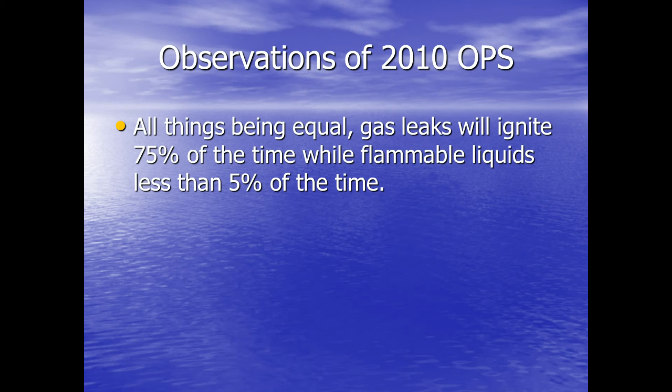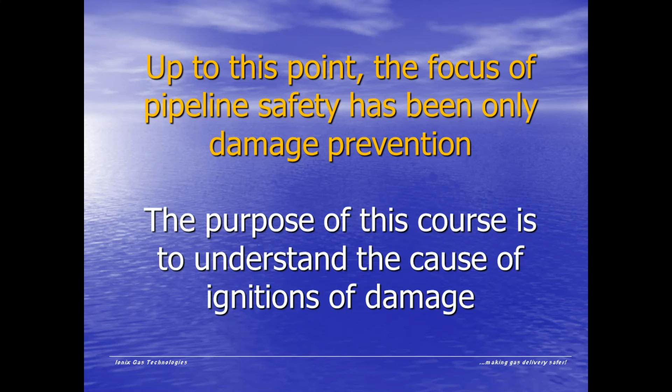So the observation of this is, all things being equal, if a natural gas pipeline leaks, 75% of the time it's going to ignite. Whereas if a liquid flammable pipeline leaks, less than 5% of the time it's going to ignite. So the real question is, at this point, the focus of pipelines and safety has generally always been about damage prevention. The purpose of this course is to understand the cause of the ignition of the damage.

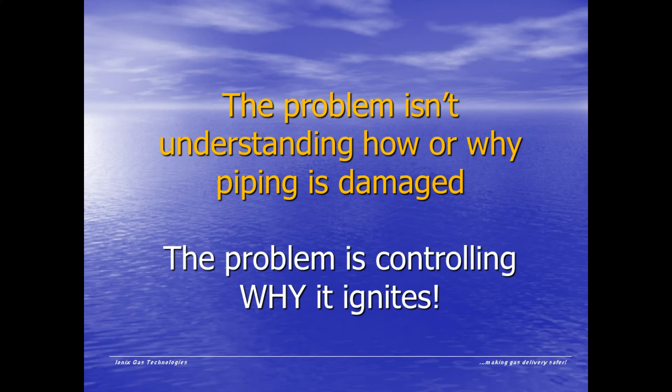The problem isn't so much understanding how or why piping is damaged. The problem is controlling why it ignites. The purpose of this course is to fill that gap, to start to explain the reasons why pipelines, when they're damaged, ignite. I hope this video will be helpful to you.

The first thing we're going to do is to talk about some presumptions as we begin the course. We have 2 goals in this course. First is a broader goal, that we want you to learn to identify known static ignition risks in your systems. By understanding some of the basic principles of static electricity in polyethylene pipe, you will be able to educate your field people to recognize a potential static ignition risk before it occurs.

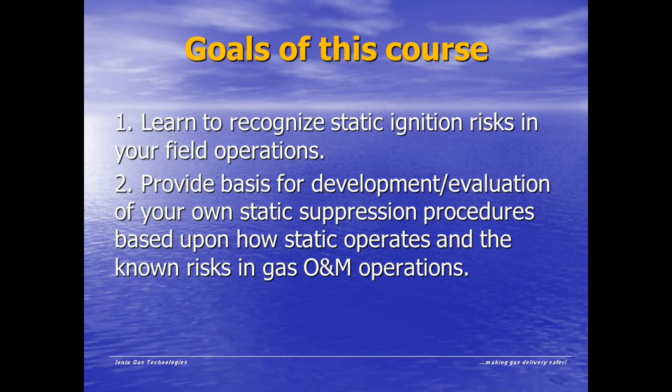The second thing we want to do is to teach you enough about static electricity so that you can go and evaluate your own static suppression procedures to make sure that they're adequate and they're effective. When we go out and talk to people, we find some gas companies have no procedures whatsoever and some have very detailed procedures.

Whatever the case may be, we hope at the end of this class you will be able to look at your operation and make sure, 1, that you have sufficient static suppression procedures for those known hazardous ignition risks, and 2, that those procedures are effective in eliminating the static in that procedure.

There are two presumptions we make here as we go through this, and I want to deal with them very quickly, and then we'll go on to understanding static electricity. The first is that static electricity is a known and researched phenomenon in the gas industry. I have some people that think you can't understand static electricity. It just shows up when it shows up. It's a black art. Nobody can understand it. That's an urban legend. As we go forward in this, I'm going to give you your industry's research about static electricity and polyethylene pipe as the basis to understand static suppression procedures.

The second thing is, we want you to understand too that your research organization has said that static electricity is a problem for all gas distributors. I have some distributors who deny they have a static issue. I have some that seem to be in fear of static. Once again, a middle ground is probably most appropriate. Here's what your research organization said about static electricity and gas operations systems: As the use of polyethylene pipe for gas distribution lines increases, the safety issues relating to electrostatic discharge of PE pipe during repair operations continue to be a major concern to the gas industry.

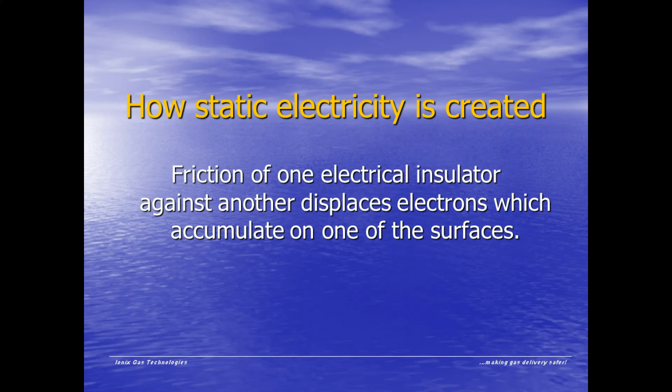Well, then the next question is, what causes static electricity? Static electricity is caused by the friction of one electrical insulator against another, and it displaces electrons and they accumulate on the surface. So in the case of natural gas in polyethylene pipelines, you have plastic, which is an electrical insulator. You have methane gas, which is an electrical insulator, inside it. And as the methane moves through the pipe, friction is caused in that pipe by the gas moving through it. These electrons get knocked off the methane molecules and they start to accumulate in certain places on the inside of that pipe. So it's friction that causes the displacement and the creation of static electricity.

And in the instance of natural gas in polyethylene pipe, it's the flow of natural gas, methane, inside the polyethylene pipe that creates the static and builds up the static charge. Well, so what? I mean, there's static everywhere. So what? Well, here's the problem. Mother Nature doesn't like electrical imbalances. The physical world is intended to be at electrical neutrality.

In the summertime, when the hot air rises and then it cools off and drops down again, the friction of the air going up and down causes static electricity, and sooner or later, those electrical charges will want to go to electrical neutrality, and in the summertime you have lightning as that static charge in the cloud arcs to the ground to neutralize each other.

Well, the same thing's going to happen inside your polyethylene pipe. If static electricity builds up, Mother Nature does not like electrical charges. It wants electrical neutrality, and it will remedy the situation. It will arc to ground sooner or later to relieve itself of the electrical charge unless you do something to prevent it. And that arcing, in the case of natural gas pipelines, will either lead to an ignition or to a pinhole leak in your pipe.

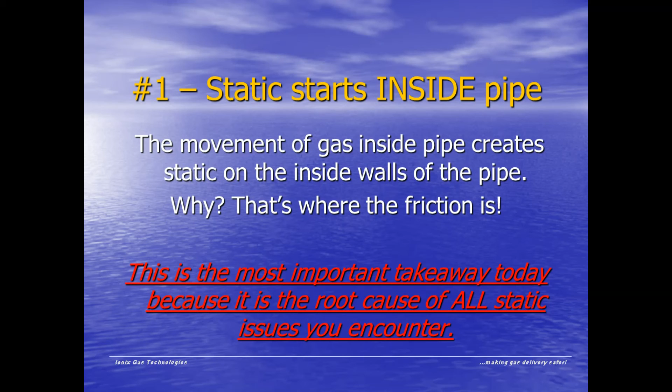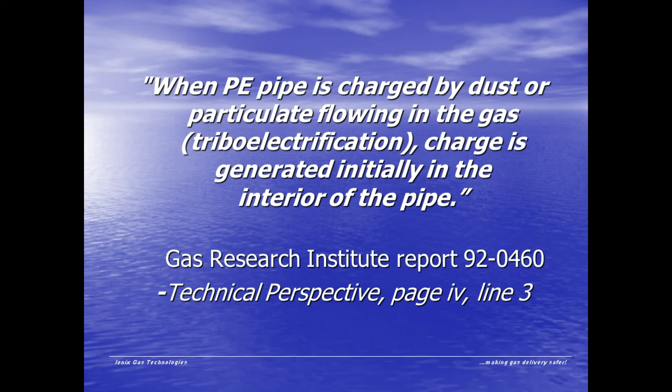If you don't remember anything else from this course, remember this first and most important principle of static electricity in polyethylene pipe. All static issues that you have ultimately are root caused inside your polyethylene pipe with the passage of gas inside the pipe. This is not my opinion. This is what your industry research company has said: when PE pipe is charged by dust or particulate flowing in the gas, triboelectrification, charge is generated initially in the interior of the pipe. All static starts inside the pipe.

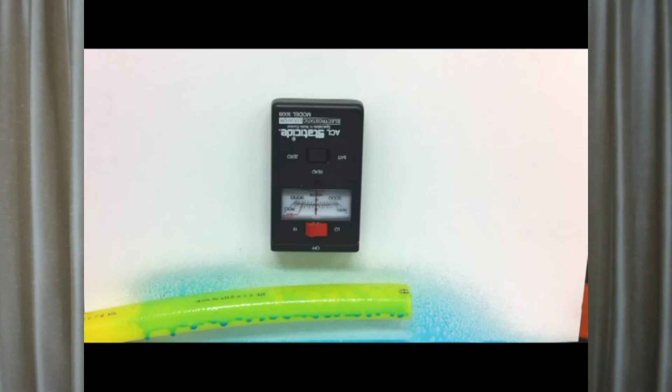As you see here, we have the electrostatic meter mounted on top pointing down and a piece of polyethylene pipe. And as I rub the pipe, you'll notice that the static meter starts to indicate the presence of static electricity and it deflects the meter. I then spray the pipe with our aerosol static suppressor, and you notice the static is then gone, indicating that we have dissipated the static on the pipe. The point of the illustration is to show you how easily static is generated on polyethylene pipe, and that really you need a meter to determine its presence.

Now, I have operators that ask me, well, should every guy have a static meter? And the answer is no. Every standards department ought to have one electrostatic voltmeter on hand for measuring purposes. However, you want to presume, and your industry research says, that you need to presume that there's static in your system. If you have your procedure contingent upon your field people making a measurement with an electrostatic voltmeter, that's a very problematic thing to do.

If they don't know how to do it, reading static's a very difficult thing to do in the field. You really need a lab environment to control your surroundings in order to get an accurate reading. And you wouldn't want a guy who misreads it and thinks there's no static, and you wind up having an incident on your hands. So you should always presume that static is there. However, a static meter is good for any operations department just to keep on hand in case they do need to measure some static.

The second principle of static and plastic pipe is this. Once static is generated or created, it just doesn't go away. It will not conduct away because it's sitting on a non-conducting material. That's why it's called static electricity. It's on a material, it just sits there. So static electricity, once it's generated in your system, is just not going to go away because you wish it away. It's going to stay there until it dissipates itself or you purposely get rid of it.

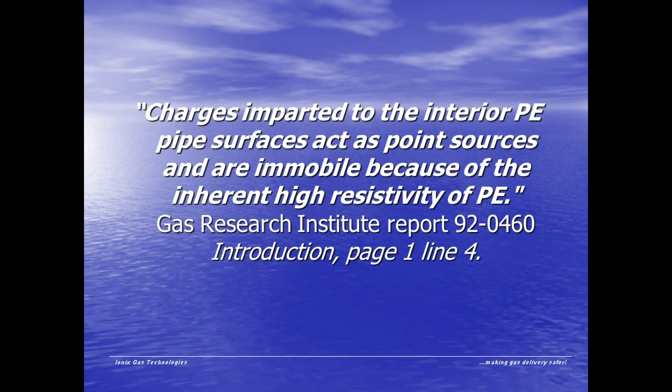Here's what your industry research company has said. Charges imparted to the interior PE pipe surfaces act as point sources and are immobile because of the inherent high resistivity of PE. In other words, what they're saying is polyethylene pipe, because it's a superior electrical insulator, when that charge gets built up in the interior of that pipe, it's just going to sit there and it won't go away until you do something about it.

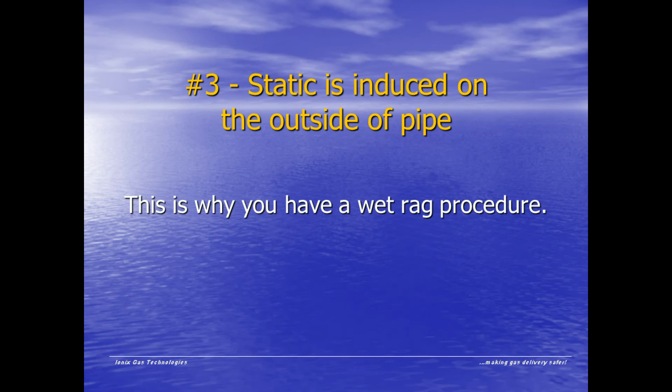The third thing is that static electricity is induced on the outside of the pipe. Now, that's why you do the external static dissipation. Remember, we said static always starts on the inside of the pipe. It stays there. And what your industry research says is that interior static induces or creates a charge on the outside surface of the pipe.

Now, I can explain in physics why that happens, but it's beyond the scope of what's necessary for you to understand. All you need to understand is that the static charge that you have on the outside of the pipe is caused by the static that's on the inside of the pipe, and that you need to dissipate the static on the outside of the pipe. Here's what your industry research organization has said. The electric field resulting from the interior charge induces exterior charge on the pipe.

Finally, the fourth principle to remember about static electricity and polyethylene pipe is that static will arc. Static electricity just won't go away. Static charges will arc and ignite a gaseous mixture if the interior static charge is exposed to ground.

Here's what your industry research company has said. The interior charge problem is still evident after gas flow has been cut off and a defective section of pipe is cut for repairs using a saw or circular cutter. When a metal object penetrates the inner wall of a charged pipe, a spark discharge is inevitable. It's not probable, it is inevitable.

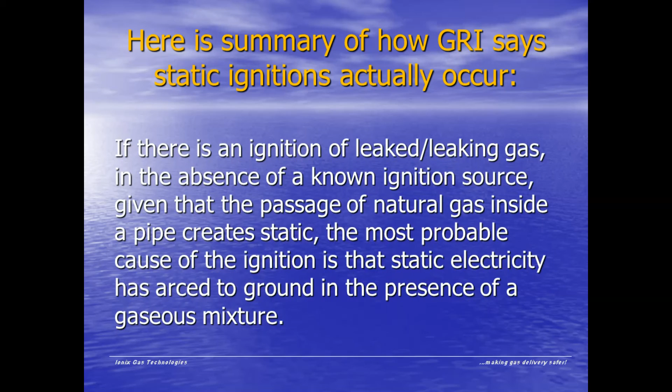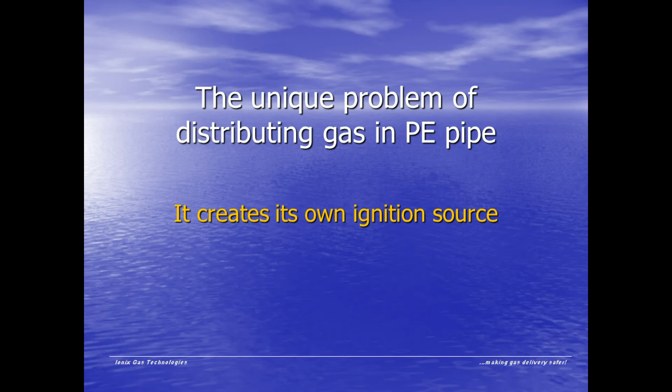The root cause is the static electricity that has been generated on the inside of the pipe. This means that you have a unique problem in distributing natural gas in polyethylene pipe. It creates its own ignition source.

This next video you're going to see was broadcast in 2001 in Oklahoma City by the Evening News. And I apologize in advance for its quality. It was broadcast over the air, and a friend of mine recorded it on his TV as it was broadcast. So the quality is quite grainy, and the audio is difficult to hear. But essentially, here's what happens.

A gas company is called out because of third-party damage, very typical, and they arrive on the scene to find gas blowing out of a third-party damaged line. They're there repairing it, putting a repair clamp on it, when all of a sudden, while they're working on the pipe, the gas ignites on camera. And you will see the guy scrambling to get out of the way as it ignites.

The question, again, just like before, is not how the pipe got damaged. The more important question is, why did it ignite? You had a trained crew there who would not use any sparking or flammable materials or procedures that would cause a spark. And yet, while they were working on it, the pipeline ignited. So as you watch this, ask yourself that question: what could have caused the ignition?

A natural gas explosion rocked an Oklahoma City neighborhood just before noon today. Workers were trying to repair a ruptured line at Northwest 131st and MacArthur when the gas ignited. Newsline 9's Heidi Browning joins us live from that neighborhood. Heidi? Well, Kelly, there's a bit of a mess out here in the neighborhood. You can see behind me what's left of a fence, charred remnants of the posts, and quite a lot of digging that's been done to make repairs to those lines. But people coming home this evening will find a much calmer scene than what many people saw this morning.

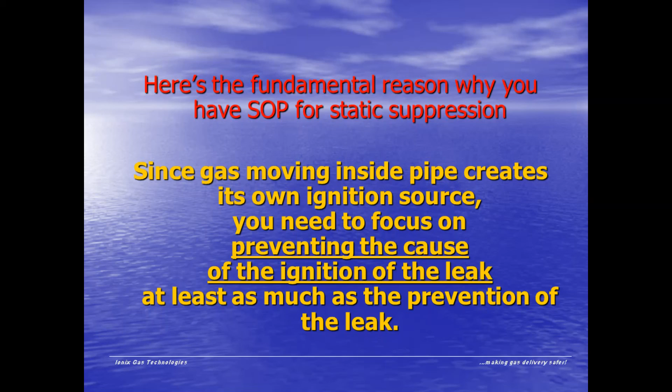So here's the fundamental reason why you have standard operating procedures for static suppression. Since gas moving inside pipe creates its own ignition source, you need to focus on preventing the cause of the ignition of the leak as much as the prevention of the leak itself. Now, up until this point in time, the only procedures that the natural gas industry had for dissipating static was very crude grounding using soapy rags. That was originally developed and recommended by the American Gas Association about 25, 30 years ago when plastic pipes started to come out and they were having static issues.

Since that time, there have been great improvements in anti-stat technology, and some of those advances are incorporated in our products which we bring to market to dissipate static. But most companies still use what's called a soapy rag or wet rag grounding method to dissipate static. And there's a couple problems with that.

The first thing you need to be aware of is that when you're using soapy rags or grounding to dissipate static, you are essentially putting your workers in close proximity to an ignition in order to get rid of the ignition. In other words, you're going to put soapy rags to dissipate a static ignition. They've got to touch the pipe that could arc to ground and cause an ignition in order to get rid of the static. The second thing is that when you use soapy rags, you really can't determine if they're effective. What I mean by that is this.

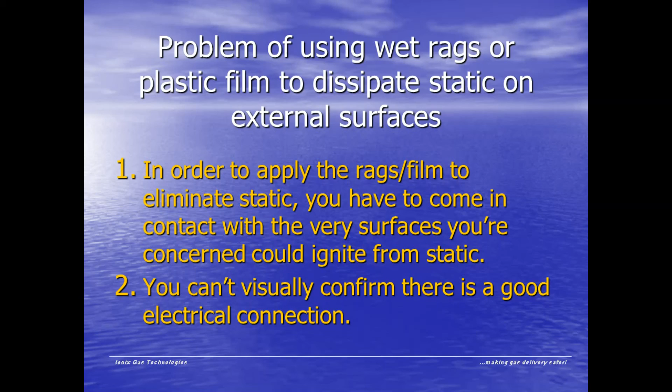Soapy rags and grounding create an electrical circuit. You wrap wet rags which conduct electricity, you put a conductor on it, and then you ground it. You're assuming that there's an electrical connection. In other words, the rag is wet enough, the electrical wire is not broken, and you got a good ground. You have no way of knowing that. You presume that's the case. But there is no visual way you can tell if you have a grounding circuit on those wet rags and ground rod.

And finally, wet rags will do nothing to eliminate static on the inside of the pipe. Think about it. You have polyethylene pipe and it's containing methane gas under pressure. What makes you think that if you put soapy wet rags on the outside of that pipe, that somehow or another that's going to dissipate the static on the inside of the pipe? Of course not. And your research organization has said that will not solve the problem of static inside the pipe.

And it's very, very important that you understand, that you're not led into a false sense of security that simply because you have put wet rags on the outside of the pipe, your static problem is finished or is dissipated. Here's what your research organization has said. Prior to this project, safety procedures involved wrapping the pipe with wet soapy burlap. This procedure is effective for neutralizing exterior charge accumulation, but does not affect the interior charge of the pipe.

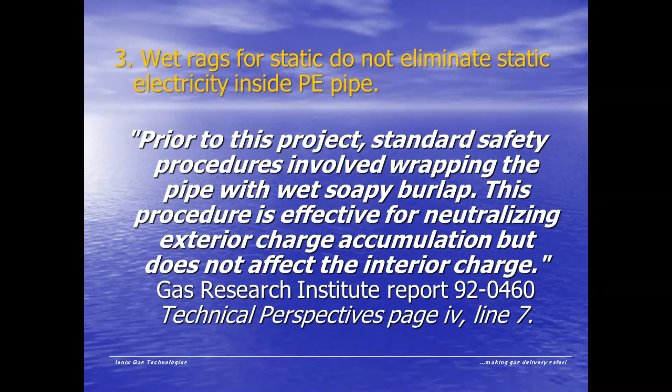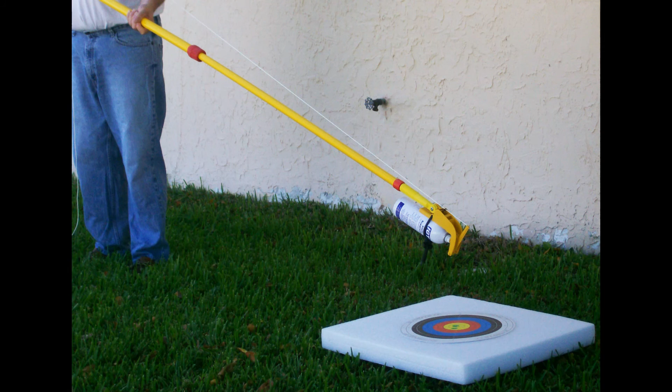Our aerosol static suppressor is a topical anti-stat, and you can apply that remotely so your people don't have to get near the static charge in order to dissipate the static charge, nor do they have to ground it for our product to work. So as we have these four basics now of static electricity and polyethylene pipe, we now can go on and take a look at the most hazardous operations that you will encounter as operators of natural gas in polyethylene pipe.

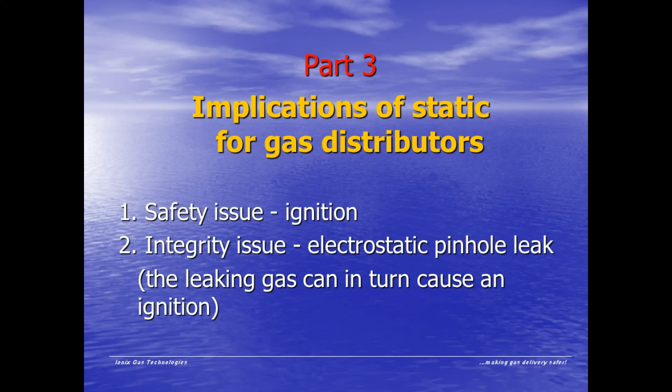Now that we understand the four basic principles of static electricity in polyethylene pipe, we can apply this to the particulars of distributing natural gas in a plastic material. Most people, when they think of static electricity in polyethylene pipe, only think of it as an ignition or safety issue. In reality, static electricity in polyethylene pipe causes two problems. The first one is an ignition risk, but the second is an integrity issue. Static electricity puts electrostatic holes in polyethylene pipe.

So as we go through this, the first thing we're going to talk about are the 5 most dangerous static ignition gas operations. And then after that, we're going to talk about the integrity problem, how static electricity puts holes in plastic pipe. So first, the ignition risk of static electricity in polyethylene pipe.

In order to have an ignition, there are 3 necessary components. You need to have a gaseous mixture of 5 to 15% methane to air. You have to have a sufficient static voltage. 3,000 volts is necessary to create 1,100 degrees heat during arcing that will ignite and begin the methane oxidation. And finally, you need proximity to electrical ground. In other words, that static charge has to arc to ground. So the instances that cause your significant ignition risk possibilities must have these 3 conditions present.

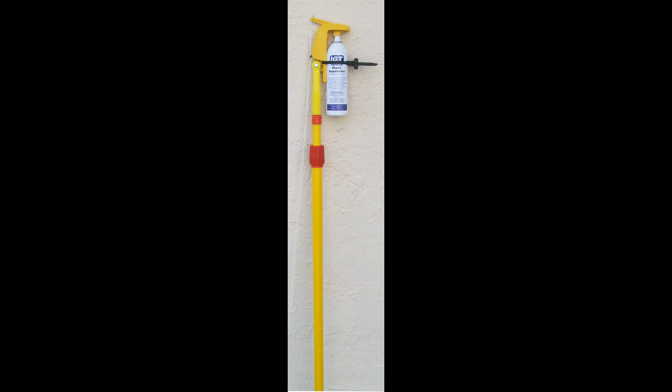In other words, we have an aerosol. Here's a picture of our aerosol reach tool. Our customers take this tool and they put our aerosol on it, and from outside the excavation, we tell them to spray into the break, into the cut, because remember, all the static starts on the inside of the pipe. So you don't want anybody to get near it. You want to spray that inside the cuts before somebody goes down in the excavation.

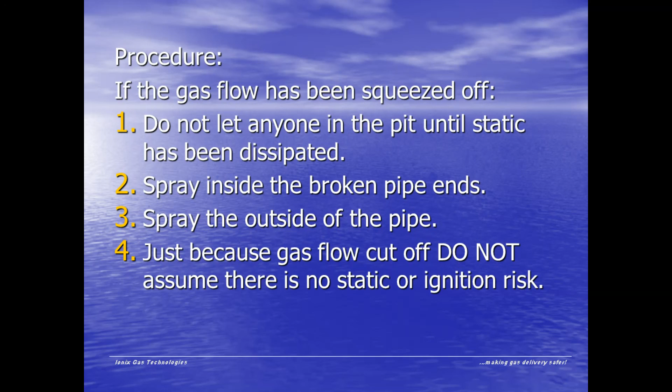And then after you spray the inside of the cut, you want to spray the outside edges around the broken ends on the outside of it. The most important thing to remember is do not assume that it's safe to enter an excavation simply because the gas flow has been cut off. Remember that static electricity, once it's created, just doesn't go away. And you put somebody down that excavation and they reach there to put some soapy burlap around it, they may act as a grounding rod and ignite the gas that's laying in the bottom of that trench.

Several months before this video, that very thing happened with very, very serious injuries to workers. So we tell our customers, after the gas flow is cut off, don't go inside the excavation until remotely you've dissipated the static inside the cut and then around the cut and around the edges.

Now, you may have a situation, and it happens, where you can't shut off the gas flow. Then what we tell our customers to do is, again, take that reach tool and spray our aerosol static suppressor as close to the cut as you possibly can, because again, the static is building up on that outside edge. Now the gas flow is going to want to push away any liquid or spray that's put around there, but at least you're getting some anti-stat in there that dissipates any static on contact.

Our product's a topical anti-stat. It doesn't need to be grounded. It's not soapy water in a can. What it does is that on a chemical basis, it literally eats up static. And so when you have a situation where you have blowing gas and you have to put somebody in the excavation, you want to keep spraying and bathing that area where that gas is escaping with our aerosol static suppressor as long as you can until you've brought everything under control.

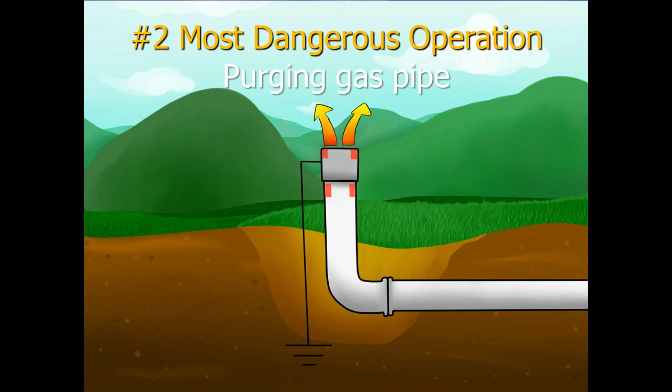The second most dangerous operation is purging. When you think about it, purging is just like third-party damage. You've got a line that's blowing gas.

Now in this illustration, you'll see that there's a grounded metal purge pipe on the end of this pipe. And everybody assumes simply because you've got a grounded pipe and it's a metal pipe, it's going to be safe and there's no static. Not true. You can have metal pipe build up static charges when coatings are on the pipe, when debris builds up. Any place on that pipe that gets oxidized or rusted, you can have a situation where it's a non-conductor and static charges can build up.

And again, just like soapy rags, you're assuming that there is an electrical contact to ground, but you can't prove that. You're assuming that. In the same way, you ground that metal pipe, you're assuming there's a circuit there. You have no way of actually knowing that's the case. So what we tell our customers to do when you're purging, even if you're using a metal grounding purge pipe, is that you take our aerosol with a reach tool and you remotely spray inside the pipe.

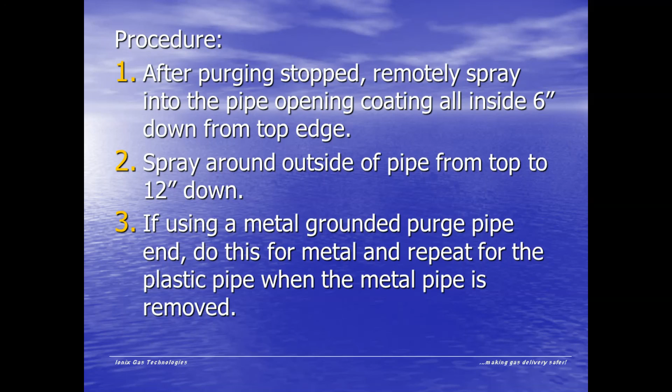Remember, the inside edges of the pipe that's blowing gas is where the static is. Remember, static always starts on the inside of the pipe. And so we tell them to first go around the pipe and spray inside the pipe remotely, then spray on the outside of the pipe, and then spray around the connection between the plastic pipe and the metal pipe before touching anything. Again, these can be very dangerous situations, and that's the reason we recommend you do this remotely.

The third most dangerous static operation is plastic pipe squeeze off. And this is more of a shock hazard as opposed to an ignition hazard. We've had numerous reports of people who have been shocked due to squeeze off of plastic pipe operations. So we tell our customers this: when you're squeezing off a plastic pipe, you need to spray the beginning and the end of the pipe, the area in front of the squeeze off and the area behind the squeeze off, before squeeze off begins, to dissipate any static.

And then after squeeze off is done, if you're going to handle this pipe, do the same thing again, remotely with the reach tool, reach down and remotely spray and dissipate the static in the front and the back of the area of squeeze off.

I taught this class at a pipeline safety conference in Wisconsin, and I remember a guy coming up afterwards and he told me how he was a young guy in the field and they'd done a squeeze off, and he says there was a big explosion and boom, and he was knocked out of the pit. No fire, he could never figure out what it was, and he realized it was static electricity during the squeeze off operation. This is very common, and therefore you need to treat it with respect and remotely dissipate the static using a reach tool before you squeeze off, and if you're going to touch the pipe afterwards, spray again before anybody touches it.

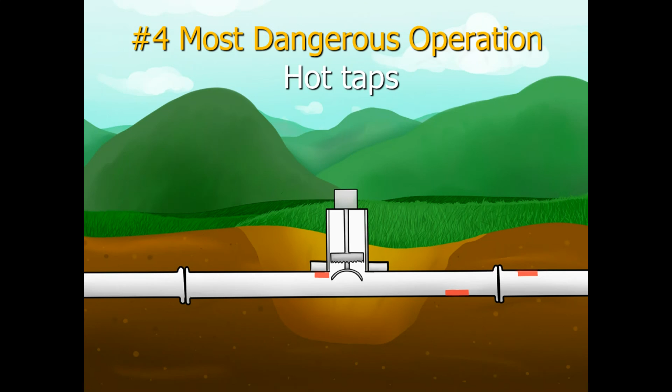The fourth most dangerous operation we've heard reports on is hot taps. What happens is when you attach the fixture and then you're drilling down, when they're pulling the coupon out, remember you can have static inside that pipe, so if they happen to drill into an area where there's a hot spot, when they pull that coupon out, they could hit an area and the exposure of the gaseous mixture could ignite.

So what our customers will do is, after they fuse the hot tap onto the pipe, they'll spray the inside of the tap with our aerosol static suppressor to dissipate any static present, and then they will also spray the tool. That way when they pull the coupon out and they're drilling, there's no static electricity that might ignite any leaking gas.

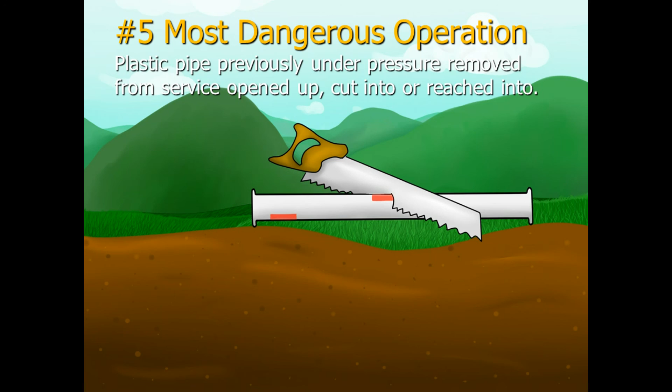Finally, the last most dangerous operation, and it's kind of a catch-all, is plastic pipe that's previously under pressure, removed from service and opened up, cut into or reached into. What we recommend for these is kind of three things in one.

So the first thing is if you're going to be cutting into pipe that's been previously in service, again, there could be static on the inside of that pipe. So what we recommend is when you're cutting into pipe, you spray our aerosol so it dribbles in and dissipates any static that might be conducted through the tool and arc a gaseous mixture.

We had an incident where customers of ours had taken a line out of service and their guys had cut through a stub line, and when they did it, there was an explosion. The guys were knocked off their feet and they thought they had an electrical line. There was no fire. It turned out there were no electrical lines in that area.

What had happened is there was static inside the pipe, and when they cut into it, just as Gas Research Institute said, when their metal tool reached that static electricity inside the pipe, it grounded the pipe and grounded that charge, and the electrical shock knocked both these guys off, and they wound up going to the hospital.

So when you're cutting into a pipe that's been in previous service, we recommend you spray into that cut. The second thing is, if you're reaching into a pipe, you ought to spray inside the pipe. We had an instance where operators had cut a large diameter plastic pipe, set it aside, and for some reason the field workers had to reach inside the pipe.

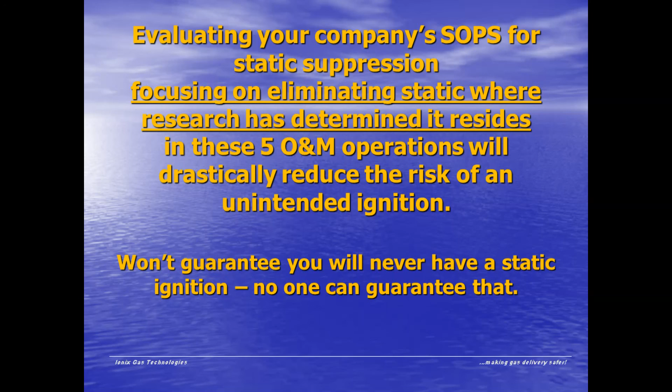In other words, these 5 operations, based on our experience, and my guess is you're going to find you've had the same problems in these operations. These are the operations you want to focus your attention on, to make sure the procedure you use is effective and covers these areas. By taking these 5 most dangerous and making procedures that address the static risks, you're going to dramatically reduce the probability of ignition in this area.

I remember a safety manager of a large utility company telling me he went through all their incidents, damages, incident reports and workers' injuries. And he said that static electricity was one of the fewer incidents that occurred, but it was always one of the most costly. So by going through your procedures and focusing on these, you'll make a big dent in reducing any possibility of static-induced ignitions.

And the reason is because, first of all, it's risk-based. You have now identified those operations that are the most dangerous, so you're focusing your static suppression efforts on the areas where there's a risk. It's selective. In other words, you're not just firing a shotgun at everything. You're not spraying everything. You're saying these areas have known risks, and you address your efforts selectively to the known risks.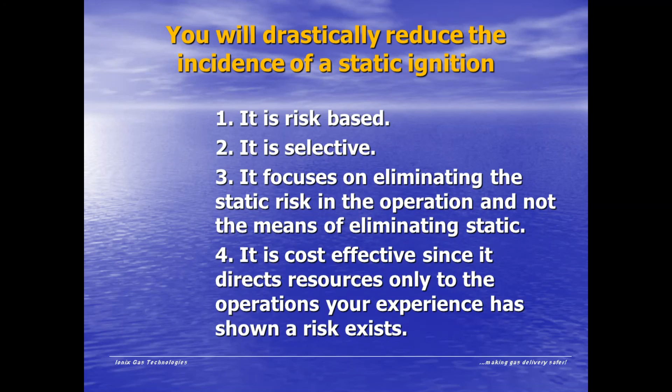So what you want to do is make sure that as you have identified the procedures that pose a static risk, the method you use to eliminate the static is effective. That's what you want to do. And the ultimate result will be a cost-effective static suppression procedure. You're not going to be wasting efforts on areas where there's really not a static risk.

On the other hand, you're going to be directing your resources, time, and training to those areas where you know there's a static risk. So in all ways, by understanding the principles of static electricity and by working through these procedures, and making sure that you have an effective static suppression procedure on the high-risk operations, you're going to minimize cost and maximize your safety.

So how do we then evaluate your company's static suppression procedures? First of all, like I said, you take these 5 most dangerous operations. You probably have procedures for most of these, but make sure these are covered. Now, you might need to add another procedure because everybody's company is different. You can't be slavish and just take these 5 that I'm giving you.

For example, I got a call one time where there was a pigging operation, and I don't know if it was in the launching or retrieving of a pig, but it was a plastic launcher, and there was an ignition. Well, when you think about it, it makes sense. It's plastic, you've got an electrical insulator. Pig, you're going to have friction, gaseous mixture because it's a pig they're retrieving or launching. They had an ignition and there were some injuries. So that company needs to have a procedure for static suppression in launching or retrieving pigs.

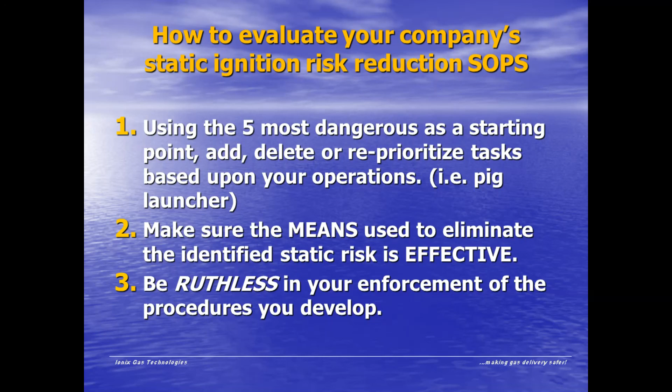And finally, you need to be ruthless in your enforcement of your procedures. I had an instance where an operator called me where there was third-party damage and they were putting soapy rags on a broken pipe. They'd squeezed it off. The guys got in their fire suits. One guy went in the hole and the other guy stayed outside the hole, but they didn't put their helmets on because it was a hot day. Sure enough, it flashed and both of them went to the emergency room. If you establish these procedures, they're only as good as your enforcement of them. You need to be ruthless in your enforcement of your procedures.

The second aspect of static electricity in polyethylene pipe is electrostatic pinholing. Most people, when they think about static electricity in polyethylene pipe, only think about the ignition risk that static creates. But in reality, it's been documented that static electricity puts holes in polyethylene pipe. So the first thing is to define what is an electrostatic pinhole. It is defined as a hole in the pipe wall created when the friction of the gas passing inside the pipe reaches a voltage high enough that it exceeds the dielectric or insulating strength of the pipe wall.

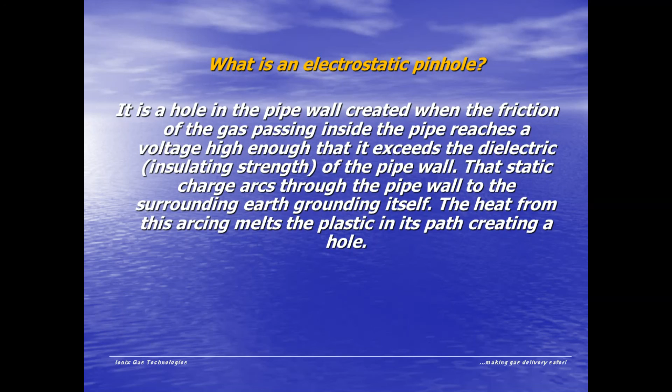The friction has created a static charge so high on the inside of the pipe that it has overcome the ability of the plastic to resist its movement. And it arcs through the plastic pipe to the ground surrounding itself. And the heat of the arcing of the static electricity melts the plastic and creates a hole in the pipe. This has been documented by your gas research company.

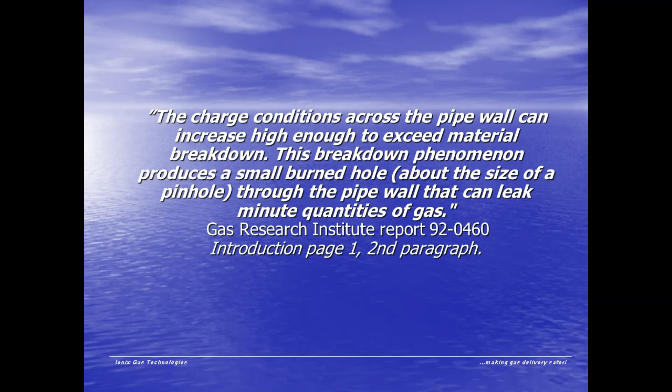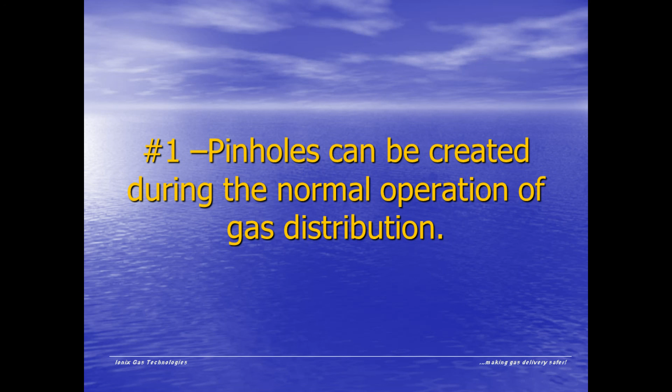Here's what they say: the charge conditions across the pipe wall can increase high enough to exceed the material breakdown. This breakdown phenomenon produces a small burned hole about the size of a pinhole through the pipe wall that can leak minute quantities of gas. So the first thing to understand about static electricity and pinholing in polyethylene pipe is that pinholes can be created during the normal operation of gas passage inside a pipe. That's what your gas research company is saying.

They say, even under apparently normal operations, when the pipe is not being squeezed, pinholing is observable because of the high turbulent flow conditions occurring near tees, elbows, etc. So you can have a situation in the normal passage of gas that the friction inside the pipe, even though it's not exposed to ground, can arc through the pipe walls and create a hole leaking minute quantities of gas.

Now, the gas distribution industry is not in the business of chasing down pinhole leaks. But the problem is you can have accumulations of pinhole leaks in areas where static is building up inside of the pipe to the point that it creates a fire hazard, or you get repeated leak calls because of the accumulation of numerous pinhole leaks.

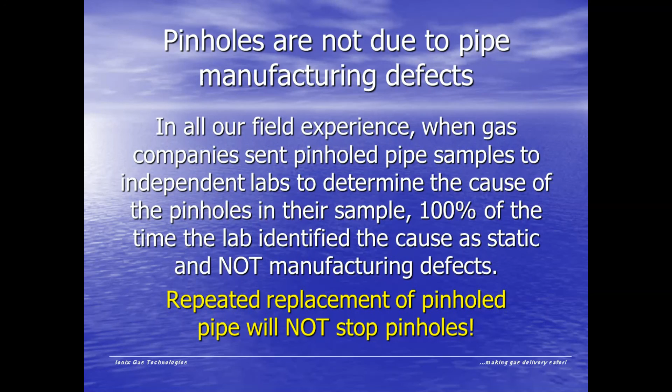And it makes sense because when you put in a pipe, if it has a manufacturing defect, it wouldn't pass a pressure test when you install it. All these lines that later had leaks in them because of pinholes passed pressure tests when they were installed. So it's important for you to be aware that static electricity can cause pinhole leaks in pipes.

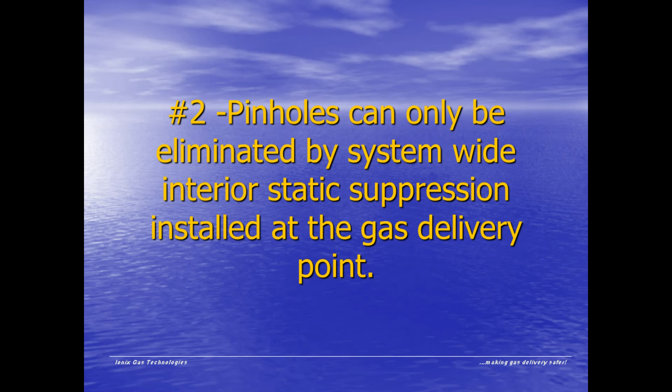And if you, as an operator, are having to repeatedly replace pinholed pipes in areas because of excessive leaks, if you keep replacing them and don't do any static mitigation, the pipes are simply going to pinhole again. Static electricity is the cause of these leaks, so unless you do interior static suppression, you will not stop the replacement of these pipes. These pipes will continue to pinhole, and you'll be continually replacing them.

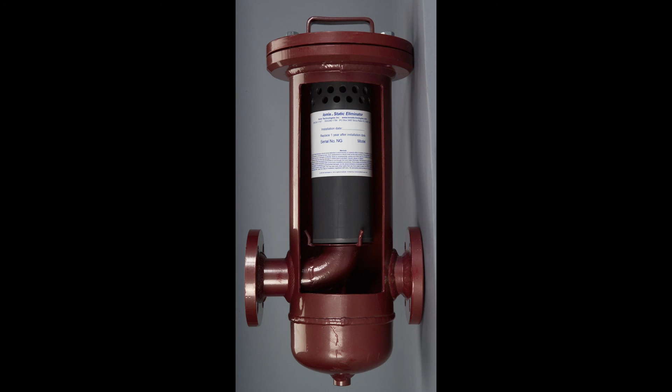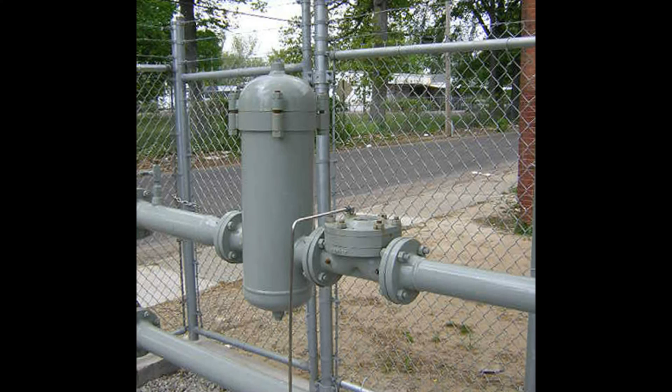It's put in the gas line, and what it will do is it dissipates the static inside the gas pipeline from the point of introduction to the burner tip. And we've had numerous customers who have installed this at their gate stations to dissipate static downstream where they were having pinholing of their service lines.

So if you're having pinholing occurring in service lines to the point that you're getting numerous leak calls and having to replace these lines with new lines because of pinhole leaks, you need to consider putting interior static suppression in order to stop this problem.

Our experience has shown there's certain characteristics of electrostatic pinholing in polyethylene pipe. First of all, most pinholes are occurring in 1 inch or smaller plastic service lines. There doesn't seem to be any pattern in the number of pinholes in a pipe. We've seen a pipe that has had 1, 2, 3, 4, 5 pinholes in it. We've only seen it in polyethylene pipe. We have not had any reports of it in PVC pipe.

We have seen it in all manufacturers' brands of pipe. We had one customer who had a line where he had 3 different manufacturer brands of pipe in this service line, and every single piece of pipe had a pinhole in it. So it is not a problem that is solely due to a particular brand of polyethylene pipe.

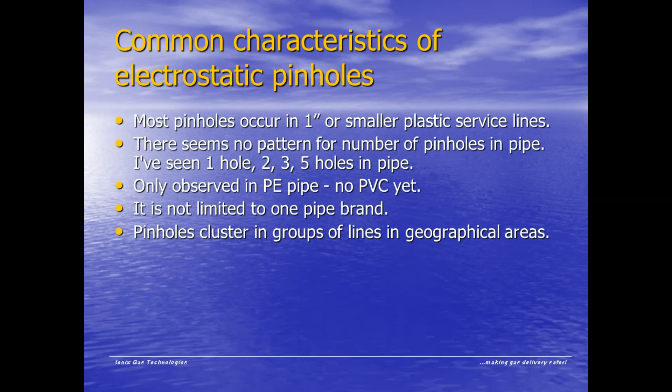And it has a tendency to cluster in areas. If you have a problem with excessive pinholing in service lines in an area, you're going to have it in that whole area. I can't tell you why it occurs in a certain area. We just know it seems to be concentrated in geographic areas.

As we conclude this video about static electricity and polyethylene gas pipe, I'd like to leave you with one final thought about pipeline safety. Pipeline safety regulations are designed to protect the public and to protect our workers. But there's also the perception of natural gas as an energy choice, which is an important consideration in your operation of your pipelines. My son-in-law works at the McGuire nuclear power plant of Duke Energy in North Carolina.

They can generate nuclear-powered electricity for 2 cents a kilowatt hour. The average wholesale price in the United States is 12 cents a kilowatt hour. You would think then that we would start building nuclear power plants left and right because it's so cheap to make electricity. But there's no consumer confidence in the generation of electrical power using nuclear means.

Malaysian Airlines lost an airliner over the Indian Ocean. And several months after that, one of their airliners got shot down over the Ukraine with all loss of life. The bookings dropped on that airline, and several months after the second incident, they had to lay off a third of their workforce because there was no consumer confidence in the safety of that airline's transportation of passengers.